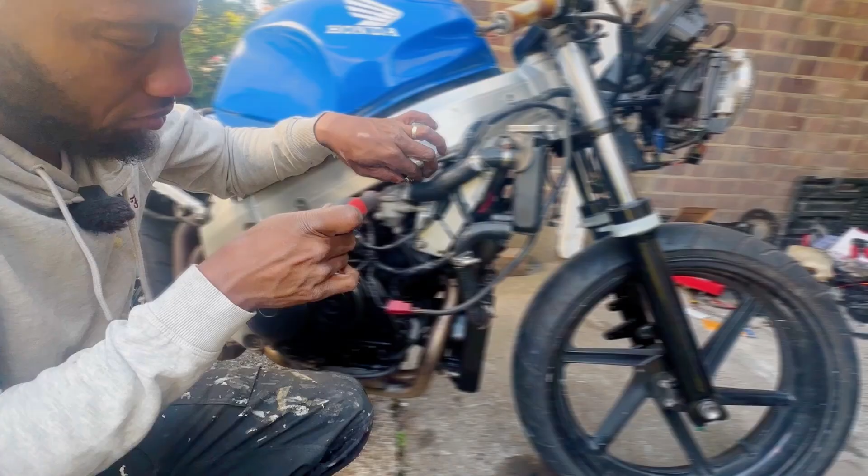So today we're going to start putting this bike back together. You saw in the last episode we got the frame back together, we got the front wheels, rear wheels, handlebars back on. I have put the engine in, which is basically I just loosely bolted the engine in the other day. So today I'm going to just continue from there. I painted a couple of parts as well, cleaned up and painted a couple of parts. So we're going to start putting a couple of these parts in as well. We're going to get straight into it and let's see how we get on.

So here we are. This is where we left off. As I said, I put the engine in. All I've done is literally just lifted the engine in and temporarily bolted it. I haven't torqued up the bolts or anything like that. That's pretty much all I've done here. So we're going to continue with working around that today and all the parts around it.

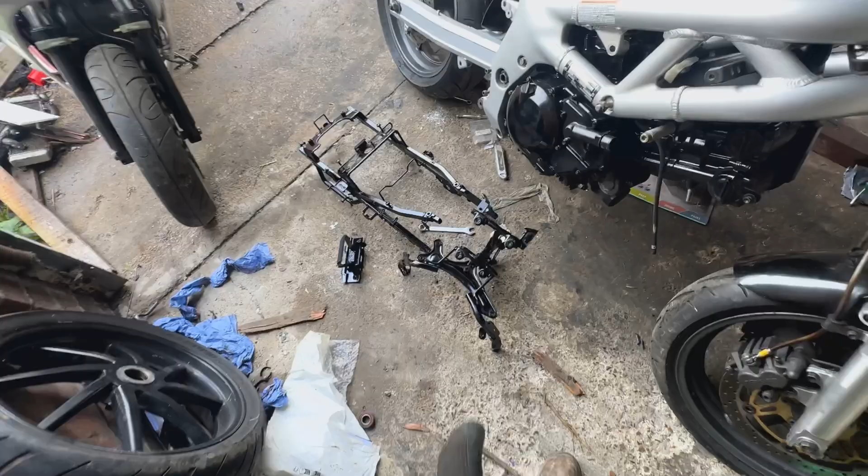As I said, I painted up a couple of parts, just trying to tidy them up a bit. I didn't go too mad with the prep work, but I'm just giving them some black paint. This part as well, I can't even remember where this actually goes, so painted this up as well. You can see what it looked like underneath. So just painted them black. The rear subframe is also painted black. And I've cleaned up the rear mud guard as well, so that's ready to go in.

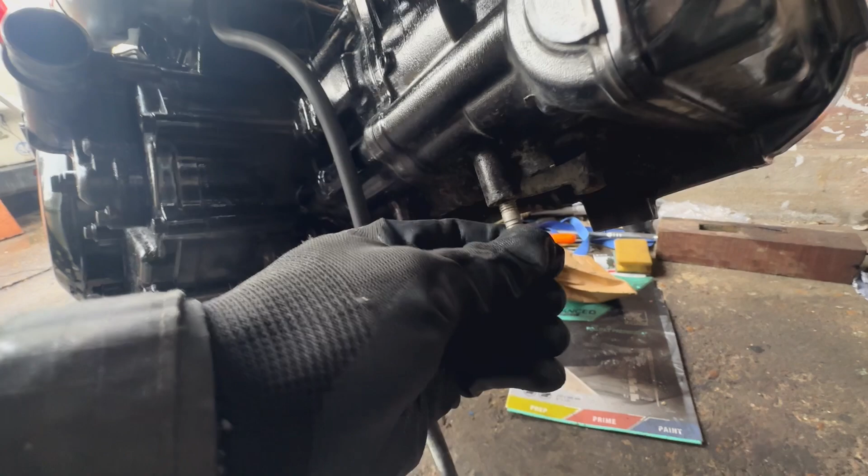If you guys remember, when I was taking this apart, I had actually snapped the two studs on the exhaust. So here's one I've just screwed in, a new one here. I managed to get this one out with heat and some sort of stud removing tool. When I was doing the other one, it snapped. Unfortunately, it snapped clean off here. I only had a bit sticking out, and then the rest of it just snapped.

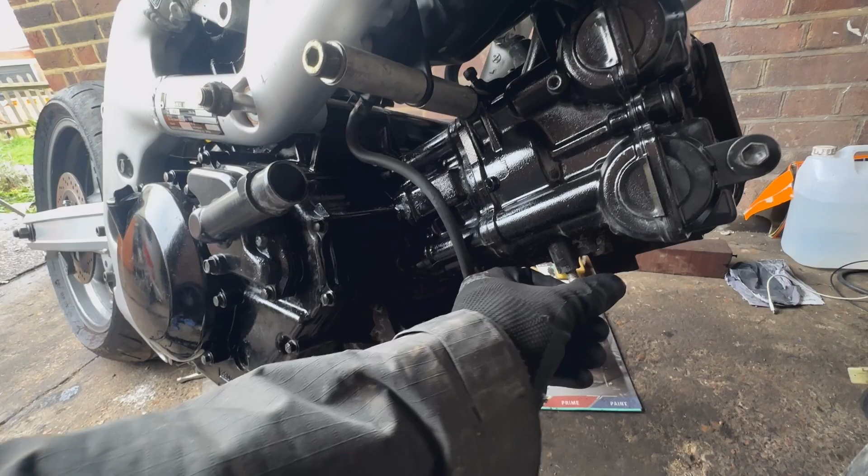So unfortunately I'm going to have to try and get in under here somehow and drill this one out. That's not going to be fun, but that's something I'm going to have to address ASAP, because until that's done we won't be able to get the exhaust back on, which we will need to be getting on soon. So I'm going to attempt to get that done today as well.

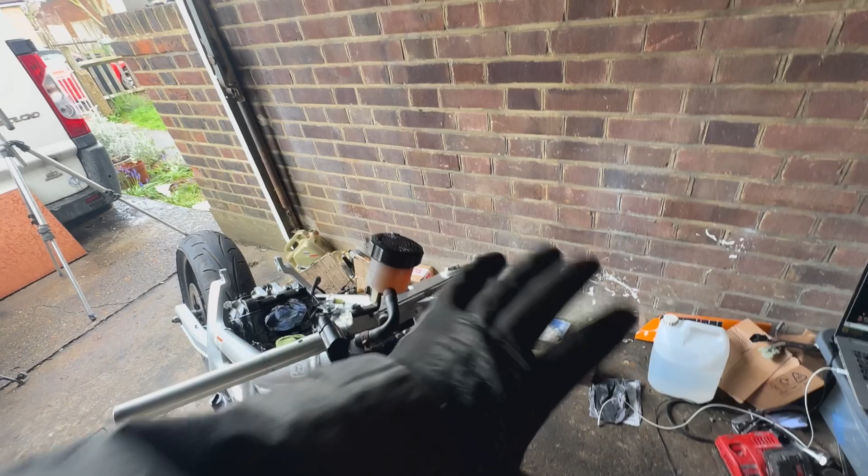But firstly, I'm going to start on putting on things like this front bracket, which goes on here. Then we can connect the clocks, the headlamps, stuff like that. Then I'm going to put the rear subframe on. Then we can get the mud guard on, and then we can probably start routing some cables maybe. We've got the radiators we can put on, radiator hoses. I've cleaned them all up. They're all in good condition. So lots of things that we can do.

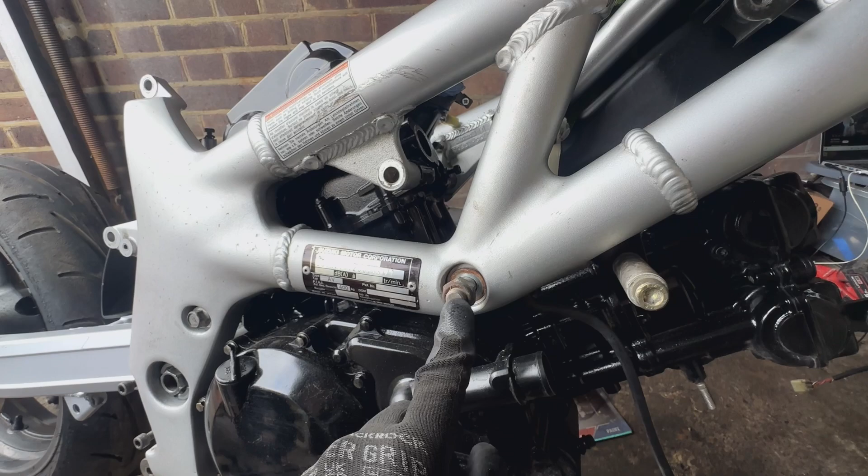Also, what I noticed with these bolts here, these are not the OEM bolts. There were crash protectors on the sides. I had to cut one of them, if you guys remember, because I couldn't get the bolt out. I think it was the one that was here. And the crash protector on the other side had taken an impact at some point, so it was bent and damaged. It needs replacing. But I think I'm going to just put in the OEM bolts.

These bolts are too long. If you look at them, they allow for the crash protector. I'm assuming these bolts came as a kit with the crash protectors. I don't have the OEM bolts, so I've ordered some and I'm going to put the OEM bolts back in. Same thing for this one. You can see how long this bolt is. It goes through this spacer here and then through the actual engine spacer. So we need a short bolt which will bolt from here to there, and then we'll get rid of this little section here.

Maybe we'll put crash protectors on in the future, I'm not sure, but for now I want to get it back to how it was. And this is the bolt that I had cut off, so I need to put a new bolt in here. I think it's an 80mm bolt. All the other bolts are on and they're just loosely tightened up. All right guys, that's enough from me. Let's crack on with it.

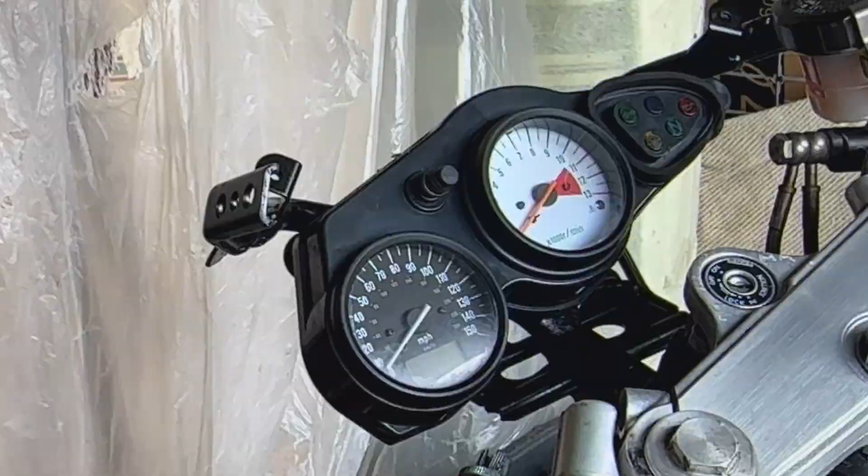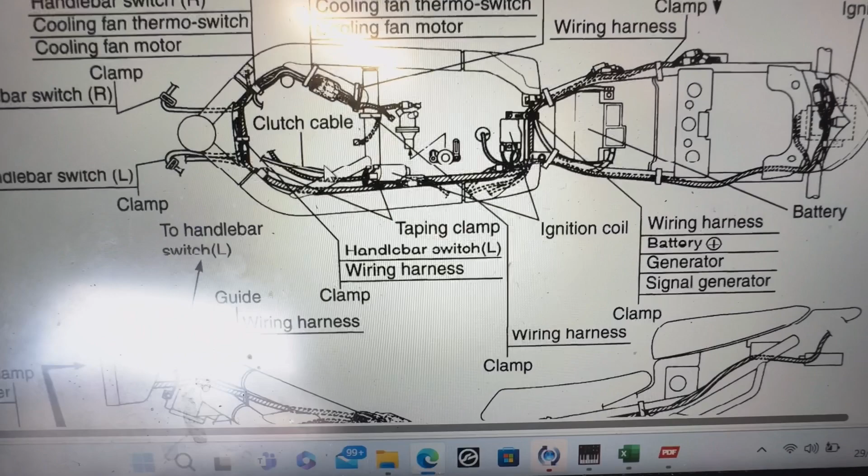Guys, so now I'm going to start routing these cables, which this wiring loom is crazy, but thankfully I have this manual which gives me, as you can see, wiring harness, cable and routing. So it shows you where all the cables are routed. So I got this online. As you can see, it shows you where all the cables are, where the brackets, clamps and all that stuff, the side. So hopefully I should be able to get it. So let's see if I can get it all right.

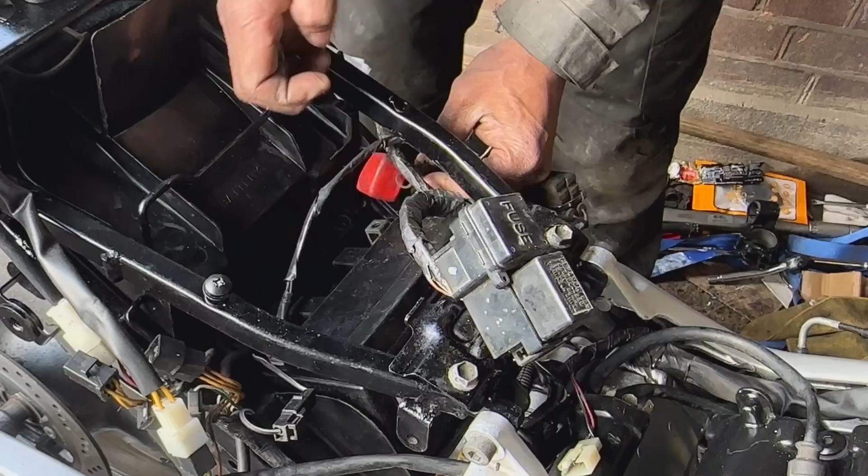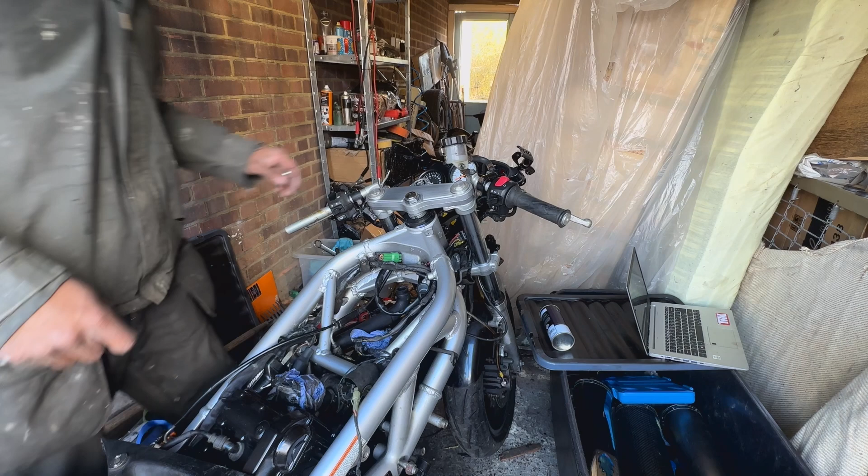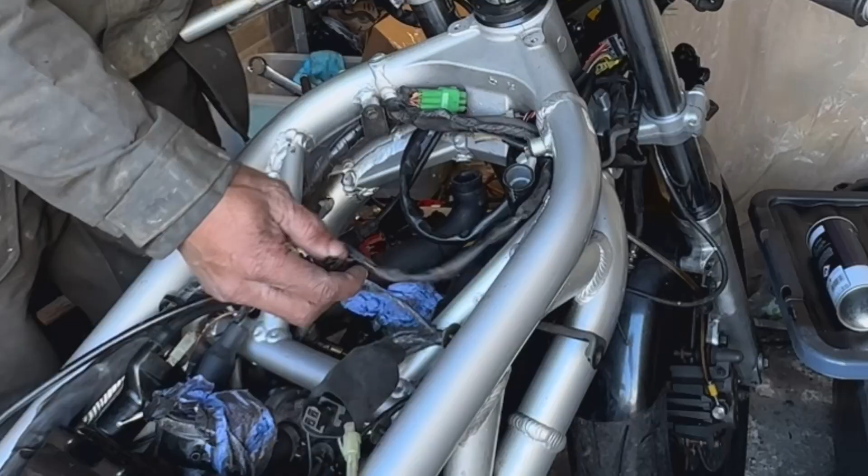Guys, so I think I finally got all the wiring routed the right way. It's taken forever, but I think I've got it all done. The only things that are not connected are, this goes to the carburetor. I think this is the throttle position sensor. I always get that mixed up. These two are for the radiator fan and the thermo-switch on the radiator, these two.

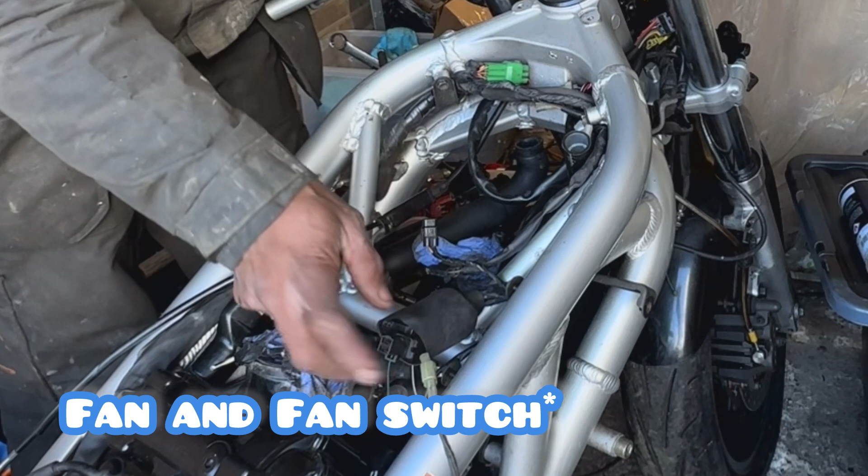This one here, I'm not sure what it is. It's probably the only one I'm not sure about. And also I can't find the cables for the rear coil pack, so I'm not sure. I need to double check that. And these are bits that go underneath the carb again. So this is all here. So that's all for the carburetors. Everything else is pretty much done, I believe, besides obviously indicators and headlamps and stuff like that.

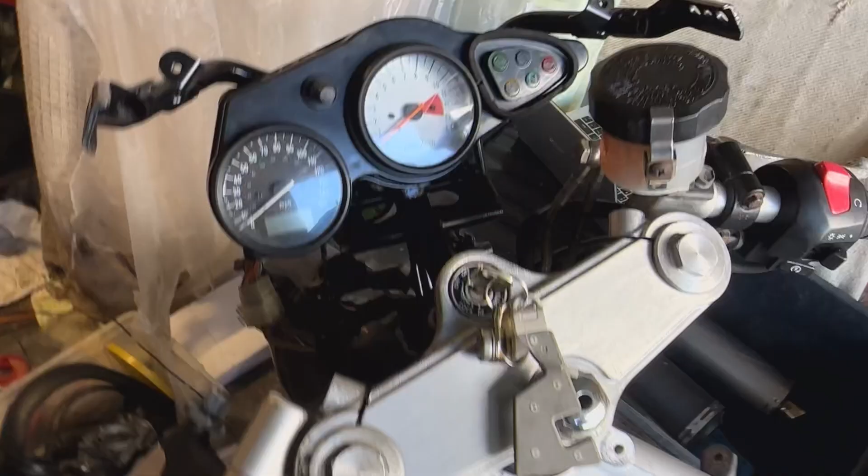So let's see if we are getting power first on the instrument panel, and then also we will see if the starter motor is cranking. All right, so let's go for it. All right, so I've already turned the alarm off, which is working, by the way. So let's turn the key and see what we get. Yes. So alarm definitely works. I think I left it too long before I turned it on. Let's see. Okay, there we go.

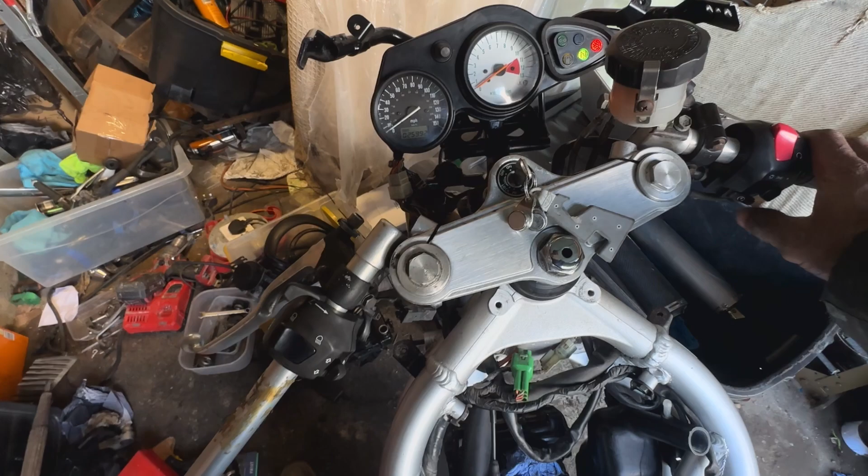So we have neutral light, we have oil pressure light, which is great. We have the odometer as well, as you guys can see. So that is good so far. So I think I should be good to try and crank it. So if we crank it, let's just see if we hear anything. Nothing. Right, so nothing on this. Why?

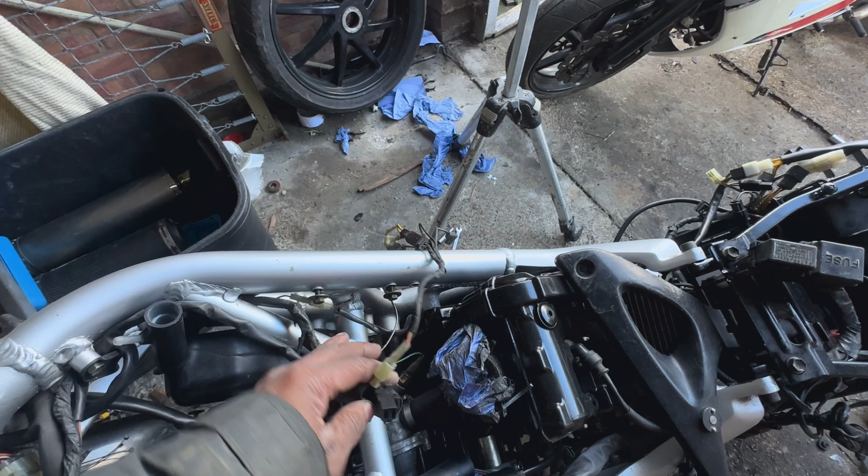Let's see, it is in neutral. These are all connected. Not sure if the radiator needs to be connected. Don't think so. Throttle position sensor, I don't think so, because I think I did crank it before without the carbs on it. This cable here, I'm not sure. I'm going to probably look at the schematic. I think we've got a brown and green cable, so that should be easy to find in the schematic. Brown and green, and looks like black and blue. So I might try and find where that goes.

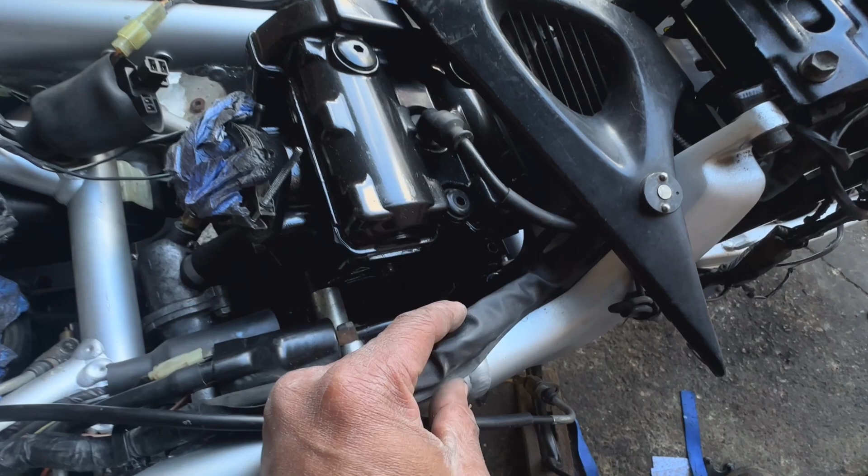I think everything else here is connected. The kickstand is connected. Yeah, so all right, let me look in the schematic and find out what this is, just to make sure that this doesn't need to be connected somewhere, and then I'll come back. Now I know what this is. I just realized this is for the horn. So this is the live and neutral for the horn. So I don't even need to check the schematic. I'm pretty sure that this is for the horn, because I haven't connected the horn up.

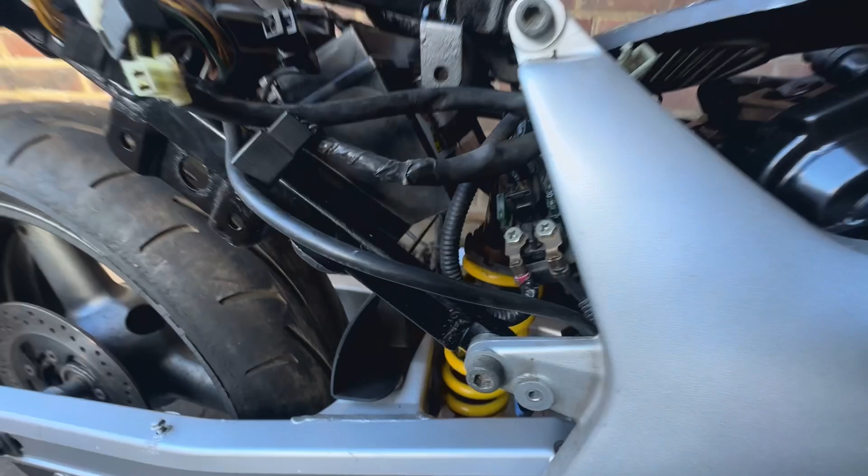So for some reason we're not getting power to the starter, unless I got these the wrong way around. I'm pretty sure I got them the right way around. So we got the feed from the battery here, and then this goes to the starter motor, which is connected. This is connected here. This is all connected, as I said before. Or have we got something here? No, this isn't connected. What is this? Does this go in there? Maybe. I'm not sure what this is.

Oh, maybe this. So I'm not sure if this is, it's not the exact same size, but it is 2 pins. I'm wondering if it needs to be connected here. I'm going to look in the schematic and see what this cable here is. Right, so this is a strange one. I just found out that this isn't actually doing anything. So it's literally just looped like that, and it's not actually doing anything. This one is actually supposed to be the brake light.

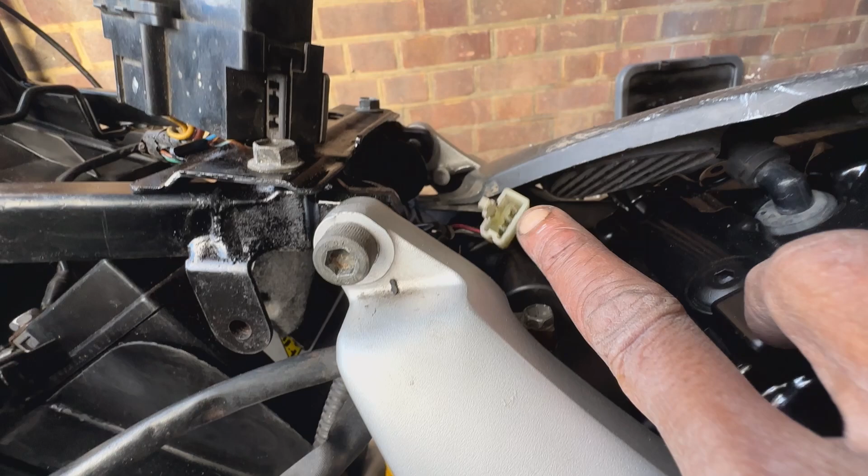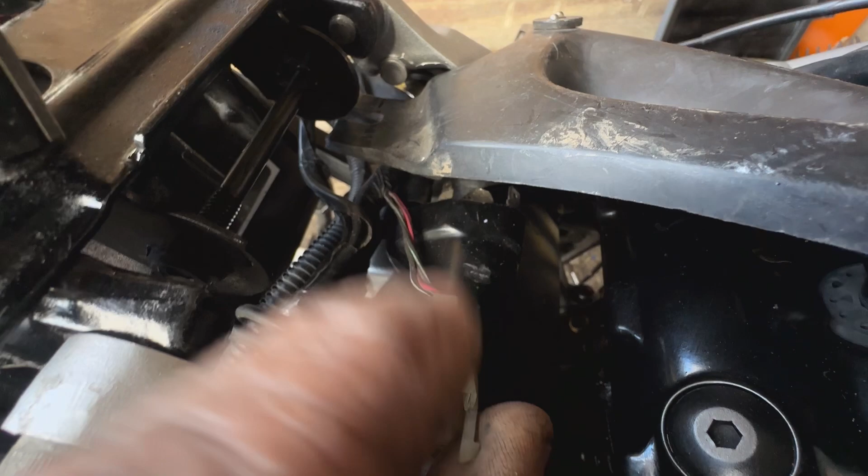So I've got to get the brake light switch. So I think it's this one, just to make sure. I'll double check that. So that leaves us with this one, which I thought was the brake light one. So there's three wires in it here. So maybe this is something. So I'm going to look into this one. We've got red, and then we've got 2 black and white stripes. Red and black stripe and 2 black and white stripes. Let's have a look at the schematic.

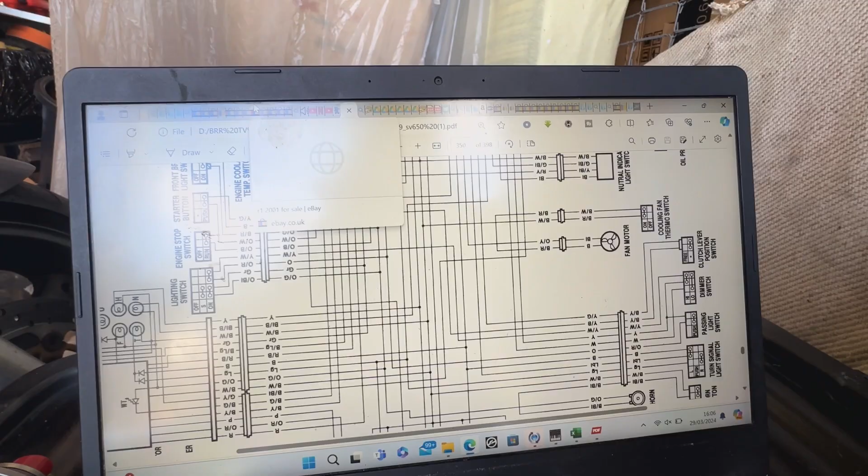So these are the connections here, for instance. So you can see this one's got 2 wires, and then it would have black and white, and black and red, that's B and R. So we're looking for one with 3 wires that has a red and black, so that should be R stroke B, and 2 black and whites, I think. So that will be BW. So looking for a connector with 3 on it. Let's see if we can find something like that.

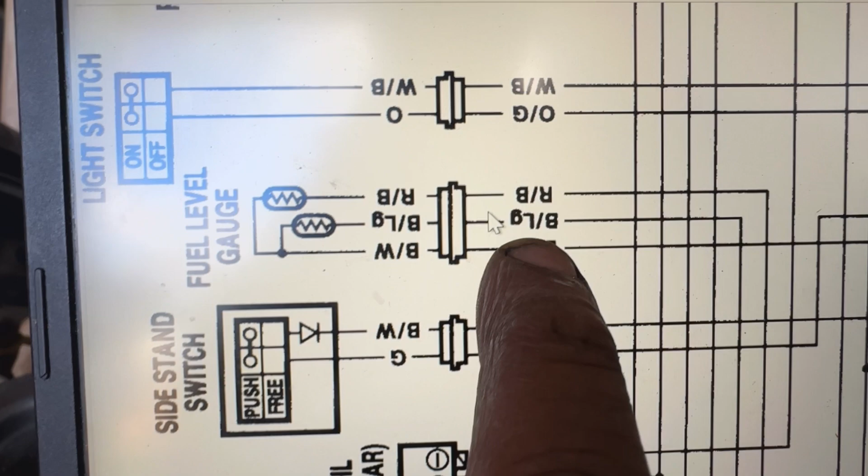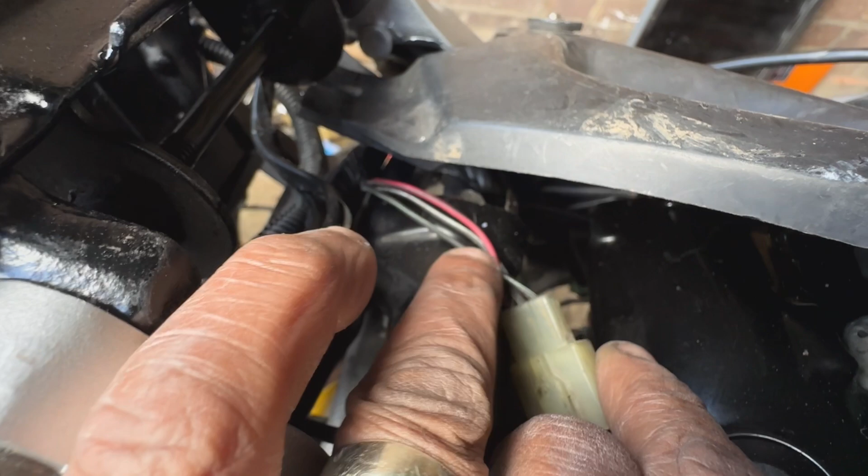What's this one here? We've got a 3 here, RB here, so that'll be red, black, and then you've got BL and BW. B white, maybe LG. What does LG mean? Let's have a look. Light green, so maybe it's light green. Maybe I'm not seeing it properly. It might be light green actually, this one. So that might be what that is.

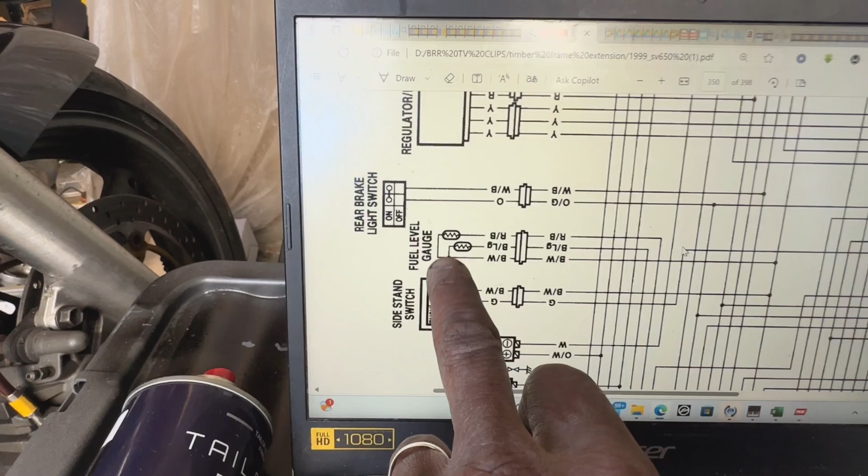And according to this, that is, what was it? Remember where it was now? Fuel level gauge. So that might go to the fuel tank, fuel level gauge. So if that's the case, that shouldn't be a problem for starting. So why are we not getting a starting?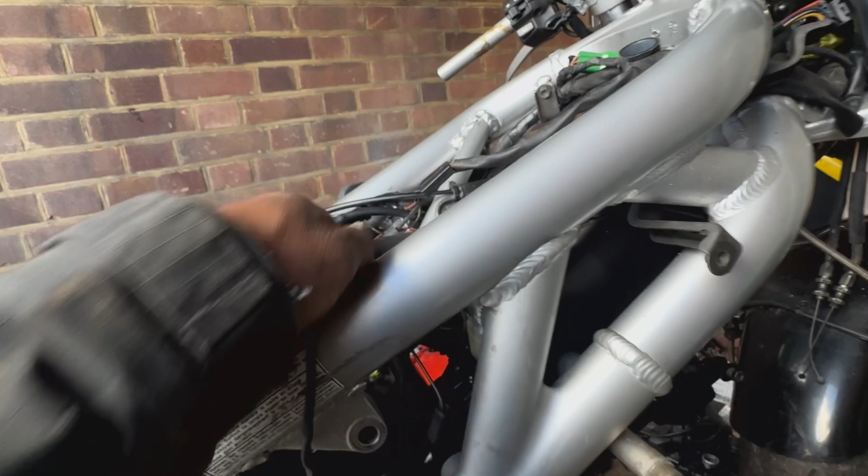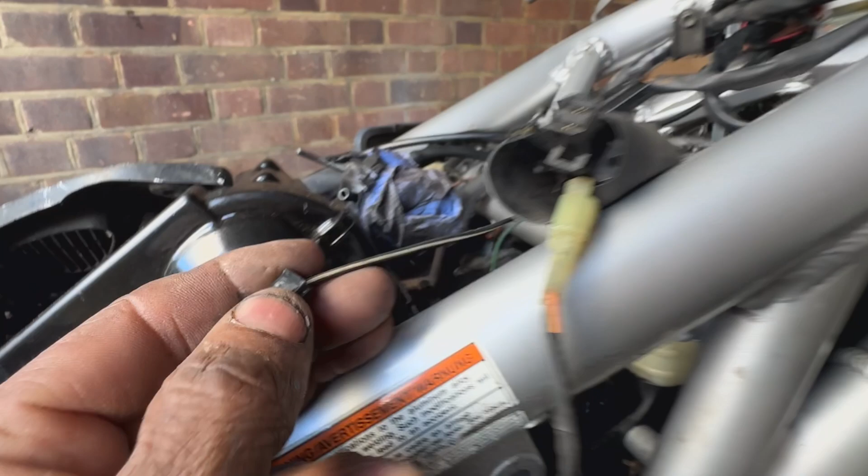We've got this here as well. Not sure what this is. Some sort of sensor. Not sure what this one is here. This is just black and white by itself. Let's see if we can find that single black and white cable. So we've got a black and white connector here that goes to the battery. Not sure if that's it. This one here.

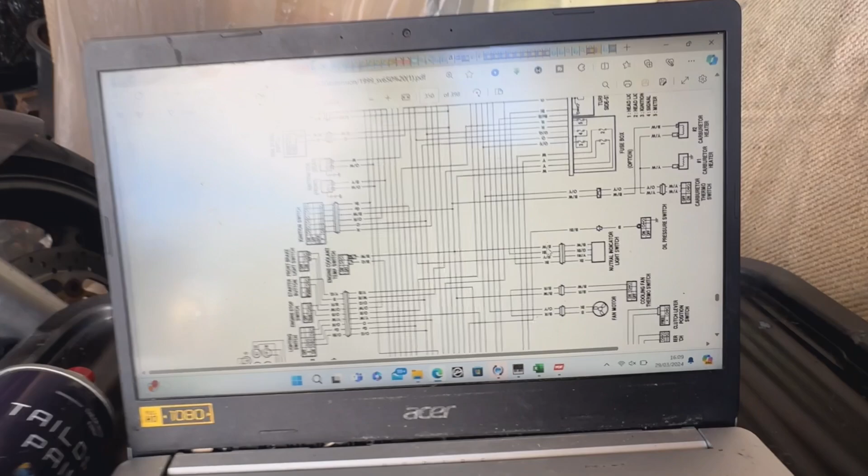Not sure. No, I found that one. That is actually connected to the battery, so it's not that one. So we're looking for a single connection with black and white. I think it's black and white.

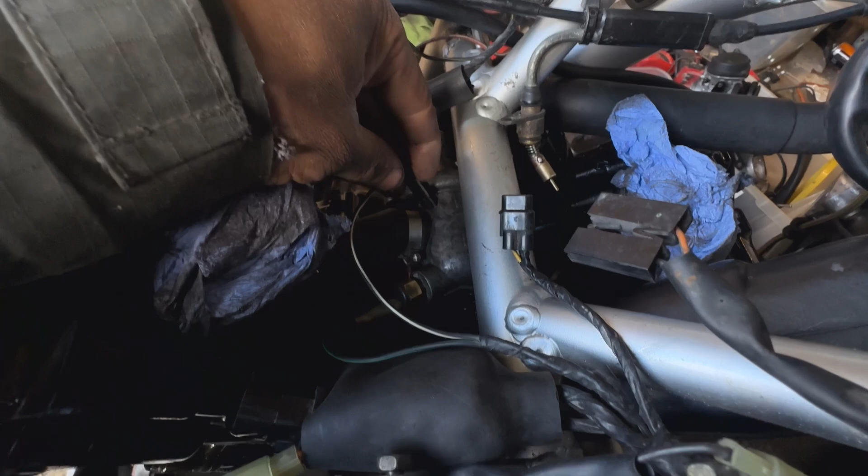All right, guys, I've come up with something. So this one I've been looking for, it seems, is the ground for the thermostat. This is where it reads the temperature. So you've got this signal here connected, which is the green and black, and then there's a black and white one. And I realized there's a little tab right down here. It's hard to see it, but on the side of this, there's a little ground tab.

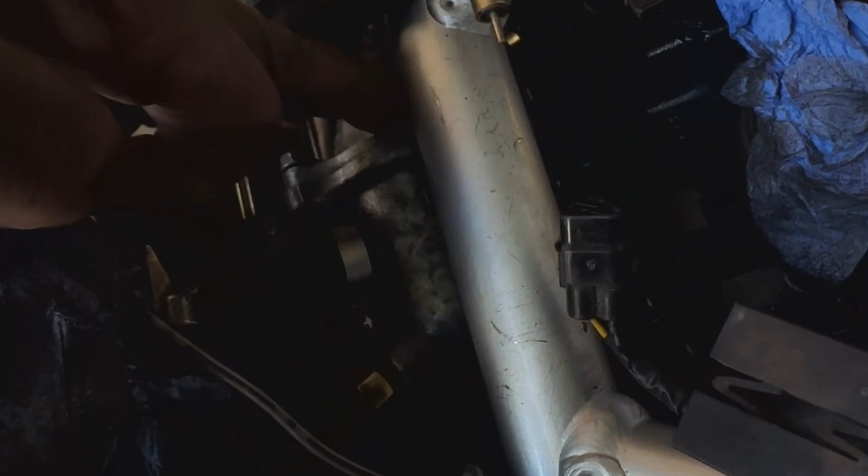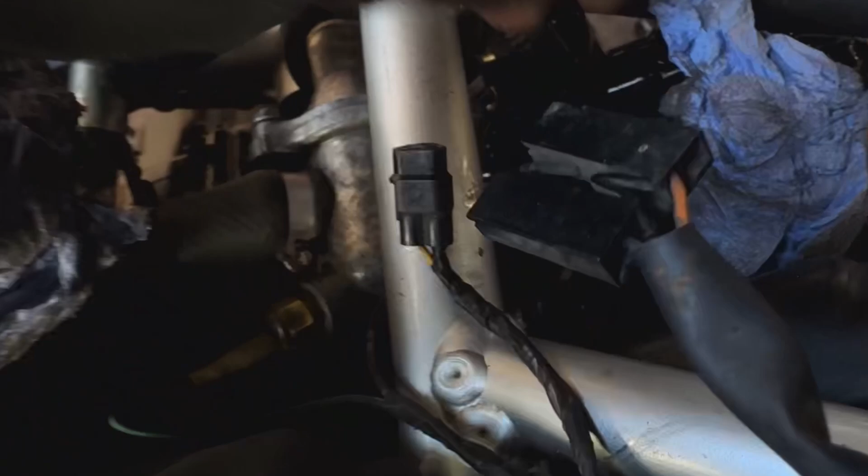So according to the schematic, the black and white is a ground cable, so it should connect to that ground tab there. There we go. And maybe because that line is open, maybe it's not starting, I don't know. So yeah, let's try it now. Let's see if my theory is right.

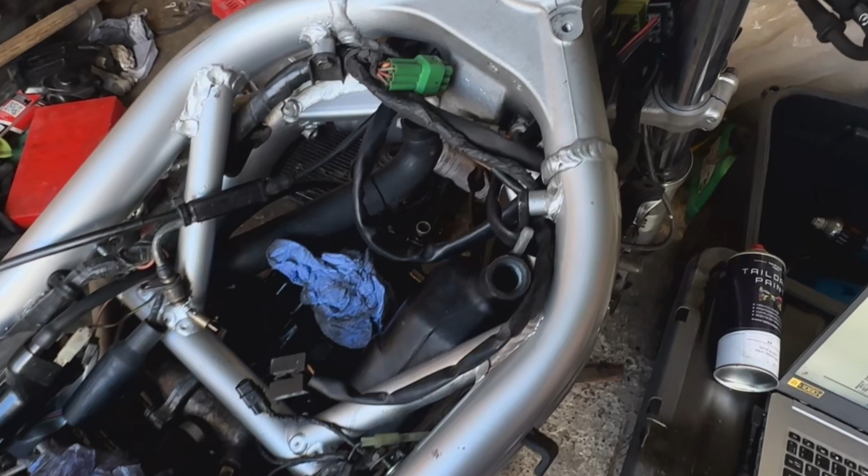Nope, I was wrong. So still dead. So that is connected. I can't really see anything else that's not connected. So why are we not getting any power to our starter motor? So here's our starter motor connected. The line is connected to the starter motor. It's connected to the battery. So for some reason we're not getting a signal to it here. So, all right, I'm gonna have to do a little bit of tracing and then come back again.

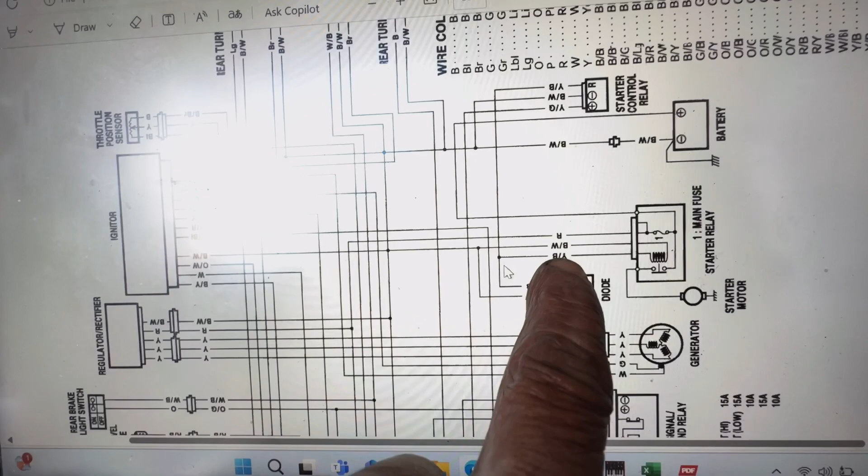All right, guys, after searching and searching, I've been trying to find this starter control relay because it's part of the circuit for the starter. So I've been following the cable from the starter relay there. There's a yellow and black cable. I found the end of it, this cable here, tucked in here somewhere. So I was looking for this cable with 3 wires, yellow and black. I think there's a yellow and green and a black and white.

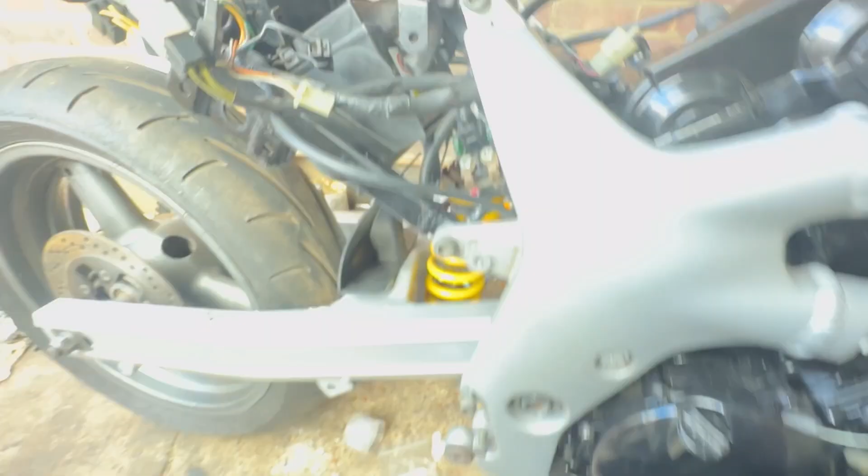So this is supposed to be connected to the starter control relay. So I must have it somewhere. So I'm gonna have a dig around and see where it goes. And this is definitely why we're not getting any start. And I see it's starting to make sense.

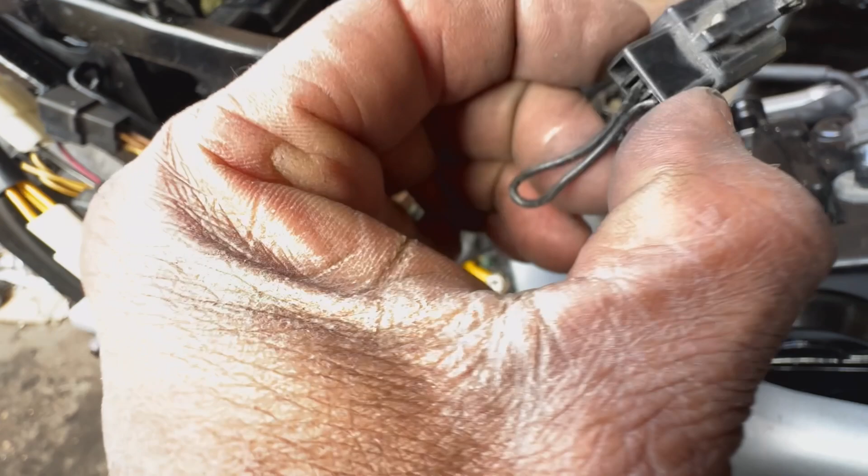So basically this cable here that was just taped up like this and hanging here must have been connected to that. So it seems like they've just bridged these two pins to get it to start. So it seems like they've bridged the green and yellow and the black and white. Is it that way? No, it's this way around, sorry. So it will be bridging the two yellows basically, yellow and green and yellow and black.

So the yellow and green and the yellow and black basically, so you've got the plus here and whatever R is, maybe that's the signal, so it's just sending the signal straight here. So I don't know, there's no relay there, just that they've done a bridge job, so that I'm pretty sure is why it hasn't been started.

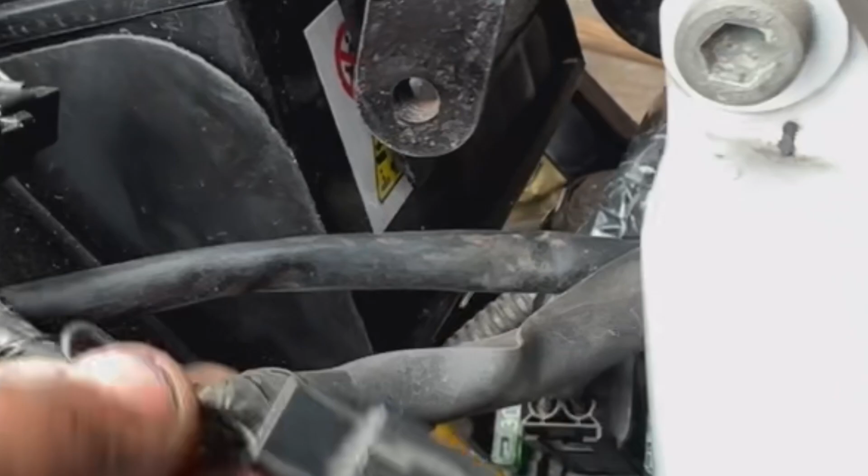So what I'm gonna have to do is just tape this back on here like that so it doesn't get lost anywhere, and then basically we're going to plug that back in here. So basically I've just taped that back here and just connected it here, so I'm pretty sure that should work now. Thank God for schematics. So we're looking for a crank now. Let's see, I've got to take the alarm off before I forget.

Let's go. Yes, there we go. We are back in business, guys. Let's take this out. That sounds great. So we have the bike cranking again. So it's just a matter then of carbs, cooling system and exhaust system.

So the exhaust system, I need to get that stud out, so I might try and see if I can get that out and then try and get it ready for tomorrow. And I think tomorrow I could probably get the exhaust on, get the carbs in and get this bike running again. We've also got the clutch cable to connect up as well. Front brakes are done. The rear brake I need to do because I need to rebuild that caliper because it's seized up, I think.

And then we've got headlights and so on. So rear light is working. I'm actually going to connect the headlight. I actually haven't connected the headlight since I've had this bike, so I'm going to connect up the headlight. Let's just make sure that's all working, just in case we need any bulbs or anything like that. So I think I'm going to do that nice and easy job next.

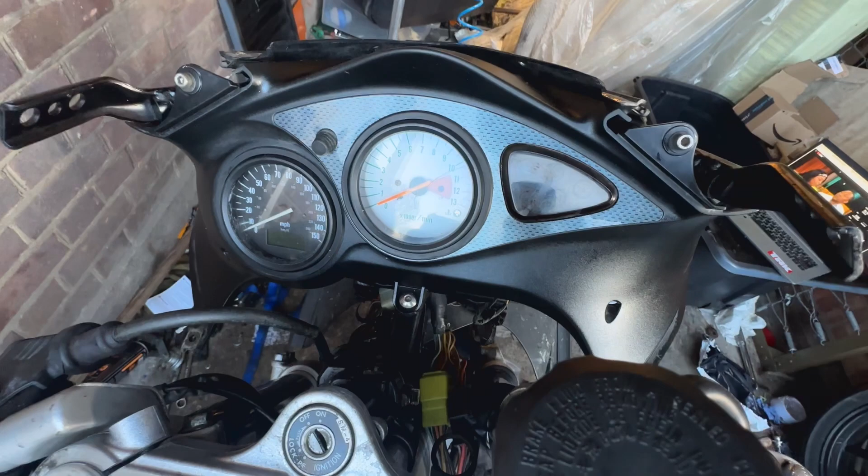The alarm system's all working. I taped up all those cables. All I've got to do is just screw this up. This is the alarm system fob, so I'll fit that all back tomorrow. But yeah, otherwise this is pretty much good. Rear lights are all working, front lights are all working. I put two new bulbs in the front as well because one of them was gone, and I had a pair of bulbs that I'd actually bought for the VFR. It ended up being the wrong ones, wrong size. They were perfect for this bike, so that was good that I had those in.

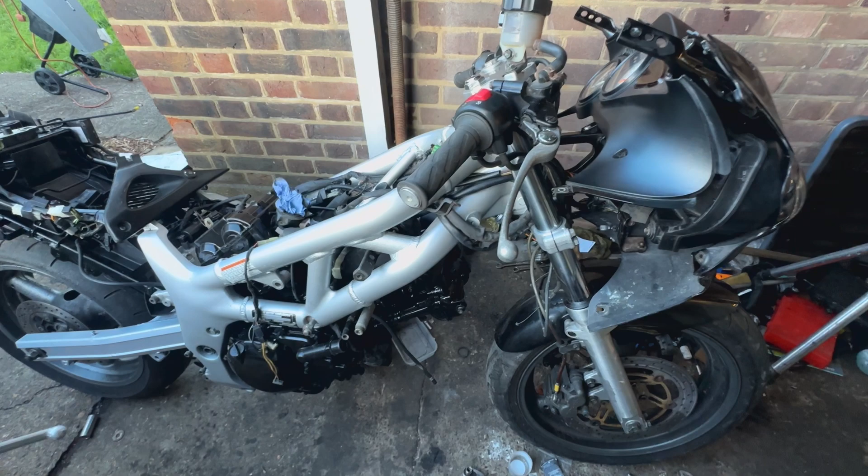So tomorrow I'm going to torque up all these engine bolts as well, and yeah, try and get these carbs back in, and try and get this bike up and running.